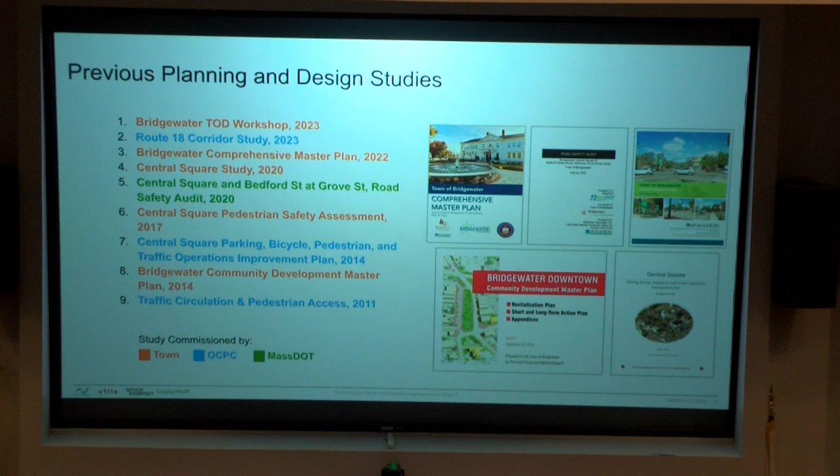Thank you all for coming out this evening. As Pete mentioned, Jeff Van Lee, Senior Project Manager with Mitch Engineering. As Bob mentioned, there's been a host of studies, documentation, planning exercises that have studied and looked at Central Square over the years, many times. I was involved with putting together the documentation for at least a few of these when I was with the previous firm, so I bring experience designing, studying, and looking at design options for Central Square.

This just gives you a host of what's been done previously, not to suggest that anything here has been incorrect or wrong, this is just the next step towards providing a positive outcome for Central Square. The latest study is coming in 2023 with the Bridgewater TOD workshop, Route 18 corridor study that was put together by the Old Colony Planning Council, the Bridgewater Comprehensive Master Plan, and the road safety audit and pedestrian safety assessment that was involved.

Bob mentioned a lot of this. Why are we here? Again, this is just taking the next step towards transforming downtown Bridgewater and Central Square back into a vibrant, community-focused, walkable center.

Again, I mentioned building this exercise based on the fundamentals of what has been presented previously. One of the fundamental reasons we are here is to take the information we've seen previously, gather your feedback, and produce construction-ready design documents so that we are ready to proceed with an actual design. I mentioned the latest traffic study was conducted in 2019 that I helped facilitate.

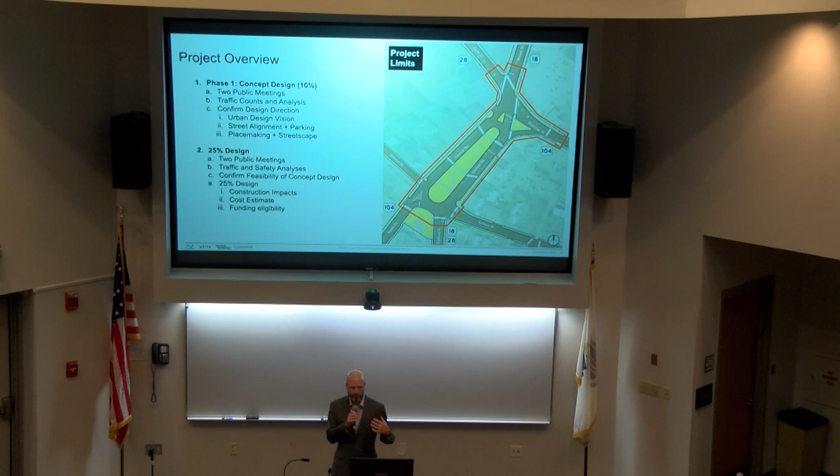We have two public meetings scheduled. This is the first of those two. I mentioned the traffic counts. The traffic analysis will follow, where we determine the appropriate vehicle turning movements and lane appropriation, so that we might establish what is useful in terms of design.

Once we're able to confirm a design direction based on the feedback, we will understand the street alignment, parking, and how that fits into the needs from a traffic perspective. What does it mean from a placemaking and streetscape standpoint? How does that fit in with designing places that people want to be and want to visit? And how do we get that to look the way we want it to?

From there, we take that to 25% design. We'll have construction documents, and we'll understand impacts a little more firmly in terms of cost perspective and how implementable it is. We'll provide a cost estimate, and then determine eligibility for funding as it relates.

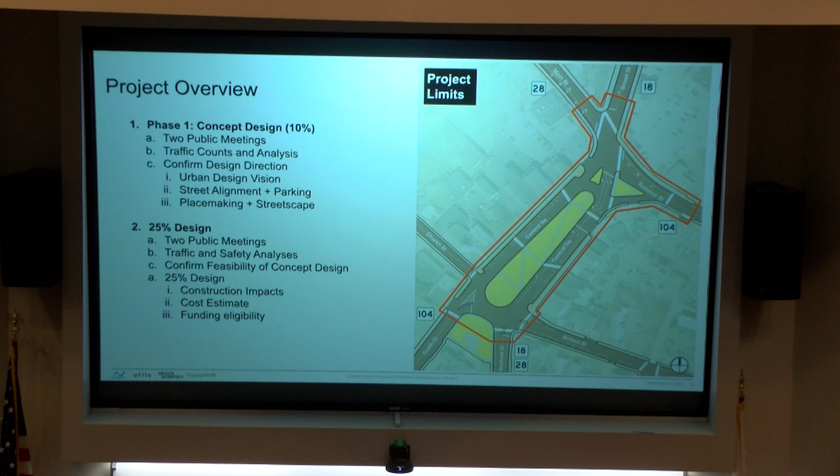So this is really just a roadmap of the previous slides — we're here now during that concept one initial phase. The second public meeting will be in December. By then we'll have a little more information from the traffic data collection and our preliminary analysis.

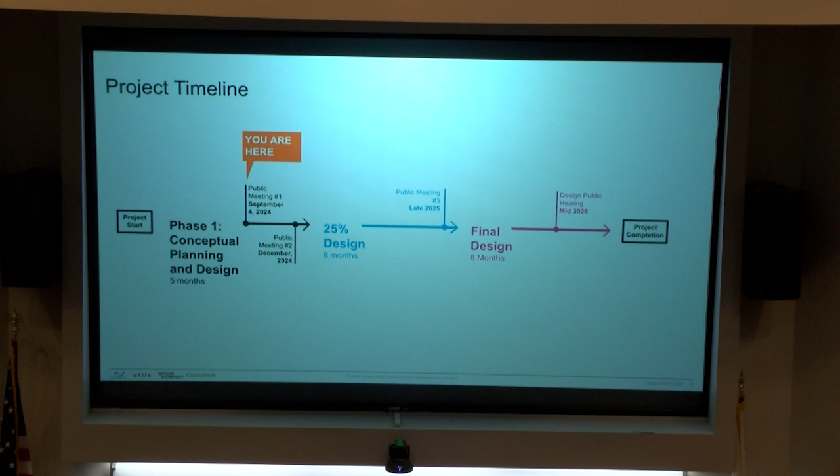Then over the next eight months, we'll take it to 25% design. We'll have another public meeting, and from there we'll take it to the final design. We'll do a design public hearing, and then we'll be on to full implementation and construction.

I know many of you are familiar with Central Square, but some of you are not. Some of the ideas we've shared over previous studies reflect what the project team understands the project goals to be. That's part of the reason we're here today — to confirm some of those project goals we're coming up with as a project team, but also to hear your feedback.

Part of the ideas we've come up with is to upgrade and rethink the need for the existing traffic signals, improve the signage and striping throughout Central Square, and improve the traffic management.

So what does that mean? Potential for widened sidewalks, shortened crossings to enhance visibility — we saw that a little bit in the video — providing bicycle facilities, and enhancing the streetscape furnishings.

The third piece speaks a little to the economics, which I haven't mentioned much, but I think it's very important — what does it mean for the viability of businesses within Central Square and in the town of Bridgewater? So how do we tie together a pedestrian-friendly environment with enhancing the availability of public space and placemaking?

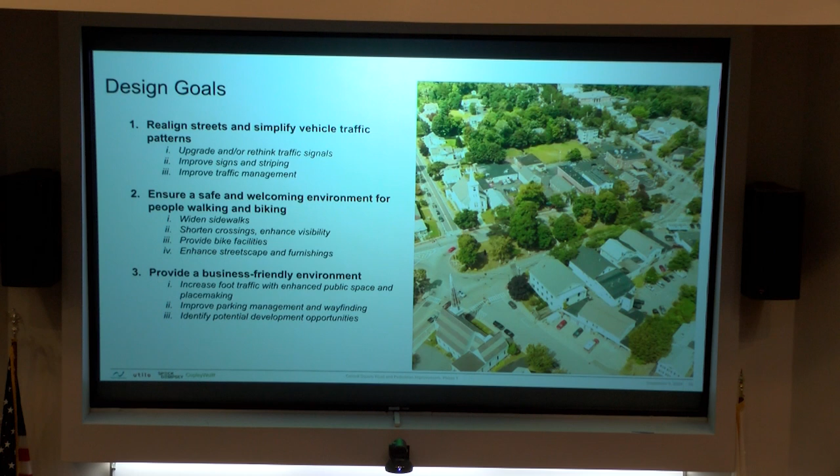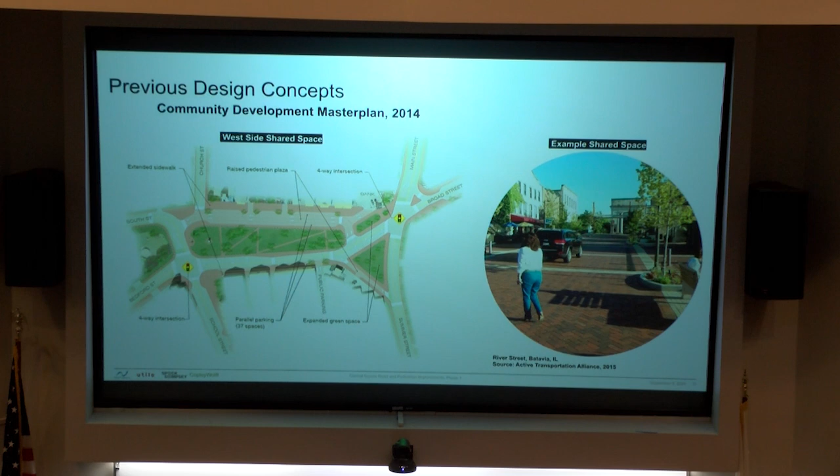So this is just a snapshot of some of the previous design concepts that have been shared previously. This first design concept was outlined back in 2014. Just for orientation purposes, north is to the right here, which is the only plan we're going to show that shows north to the right. Everything else will show north straight up into the page.

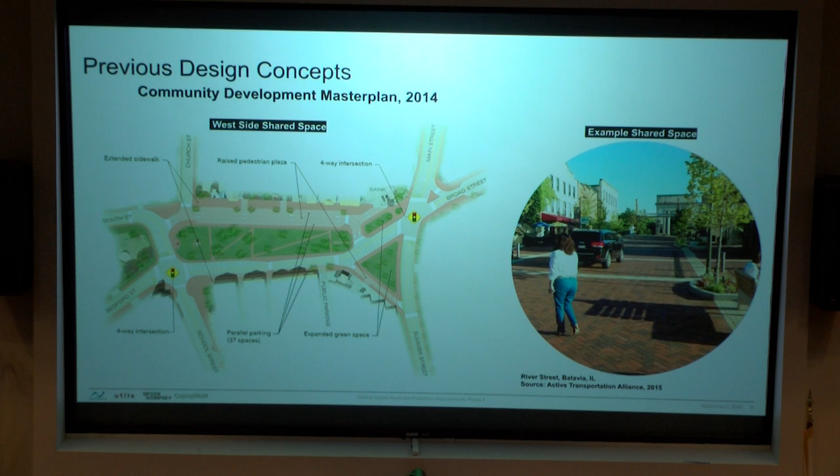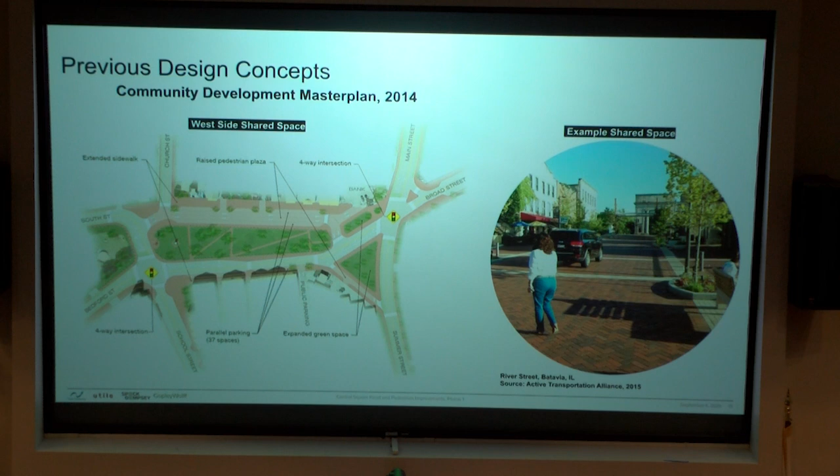This concept looked at a shared space concept, shown on the right here, providing a bit more multimodal viability, having pedestrians, bicycles, and vehicles coexist in a singular environment. One idea floated back in 2014 was to convert the west side of Central Square to that shared space, converting all vehicle travel to the east side. A lot of this comes with enhancements, because as much as we want to get people out biking and walking, we realize there's significant vehicle traffic through Central Square, so we want to be conscious of how our design fits into that element.

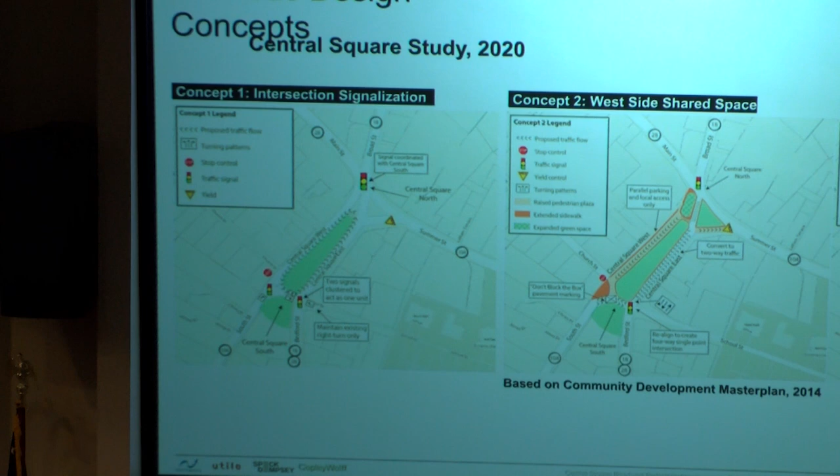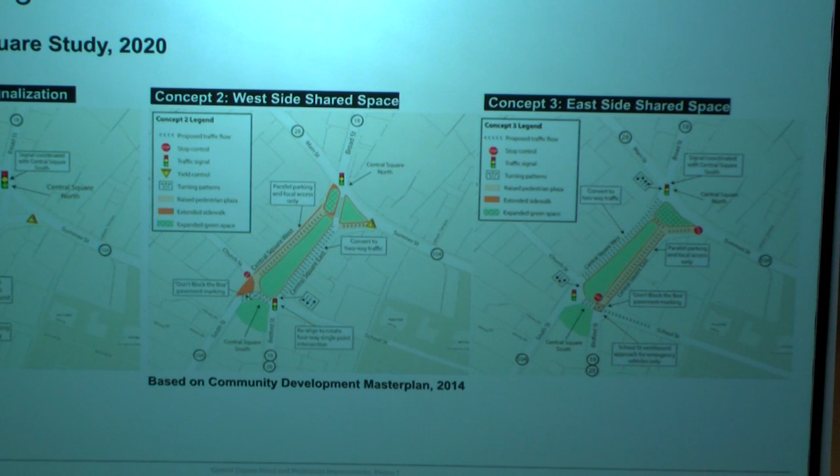Here is a snapshot of some of the other design concepts I worked with when I was with the previous firm. The concept I just showed is the same concept shown in the center here. When I was developing that study back in 2020, we implemented that concept as concept 2, providing further enhancement by talking about lane configuration and signal timing and how that fits in. We were able to use that as a jumping off point into other concepts we could potentially look into.

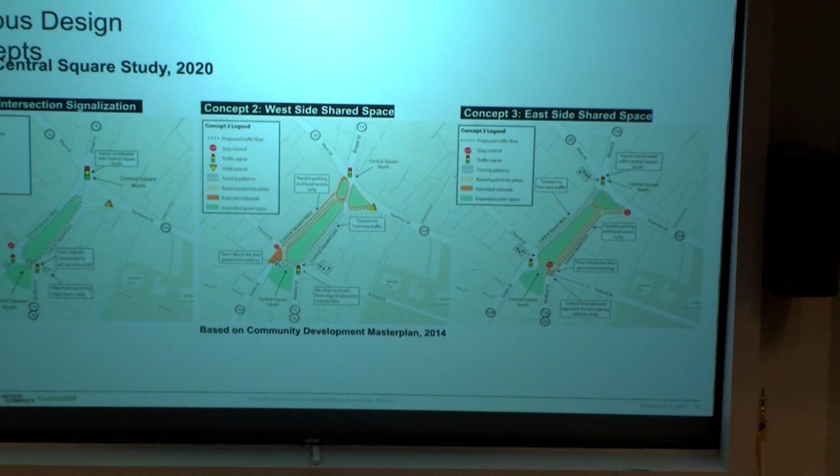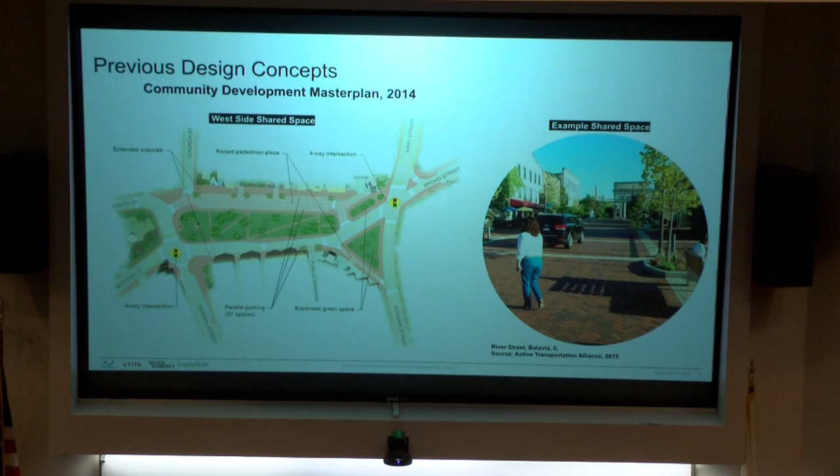The first one we looked into, I'll mention because it's sort of a mirror image of concept 2 shown here, is the desire for a potential east side shared space. It's essentially the same concept, only this would be implemented on the east side, and all vehicular traffic would be moved to the west side.

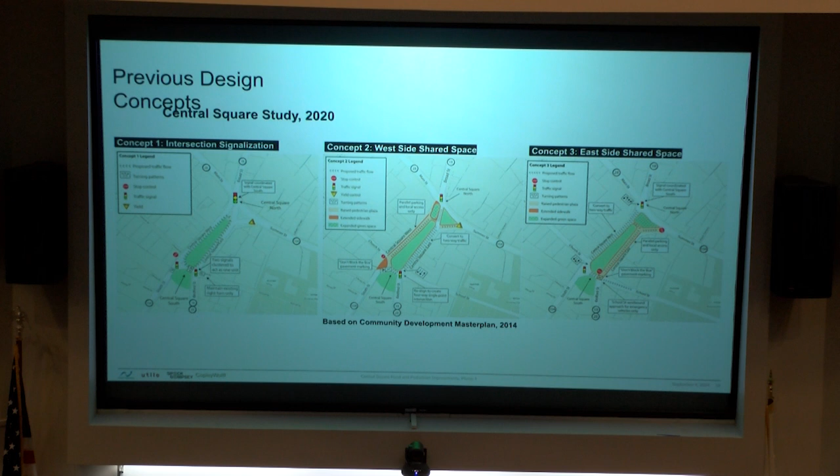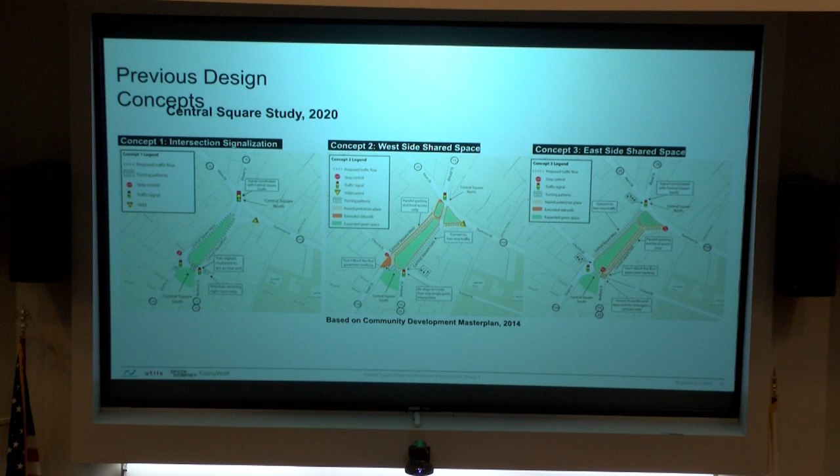The first concept shown to the left is just a cleaned up version of the existing conditions today, with the implementation of a full traffic signal at both intersections on the south side of Central Square. Obviously the traffic signal timing would have to be adjusted to provide the ability for traffic to move efficiently through Central Square. So these are the 3 concepts we came up with back in 2020.

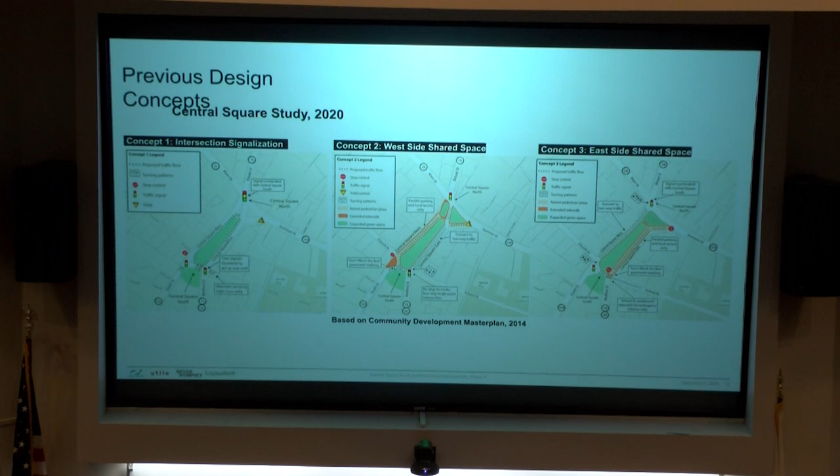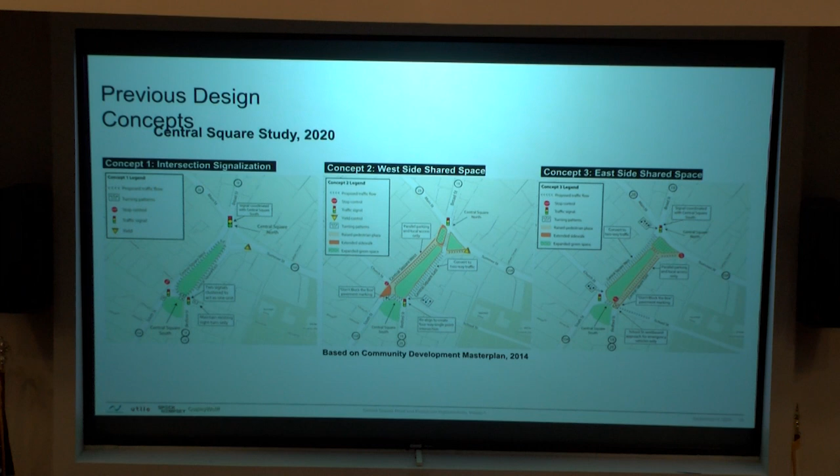Does that take away from the green space of the common itself? That's a fantastic question. This would not. This would be used only within the curb-to-curb width that exists today. There would potentially be some geometric modifications along the edges to facilitate heavy vehicle turning movements, but the majority of Central Square would remain unchanged from the curb-to-curb width.

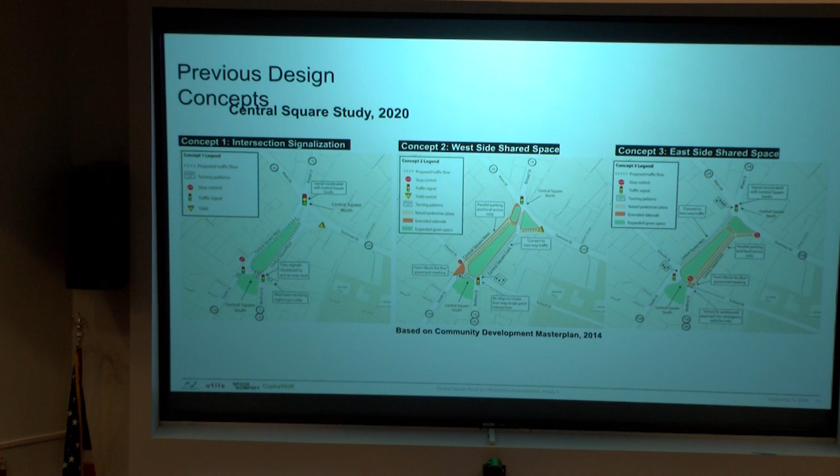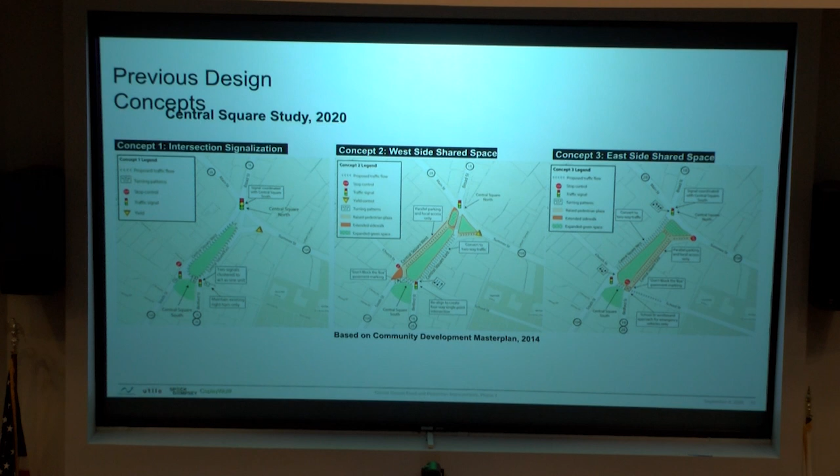When you say the majority, how much percentage-wise? It's difficult to say because we need to make sure that vehicles traveling through here have the ability to geometrically execute the maneuvers. From looking at these, those modifications would be fairly... Why don't people just use their blinkers? I like that.

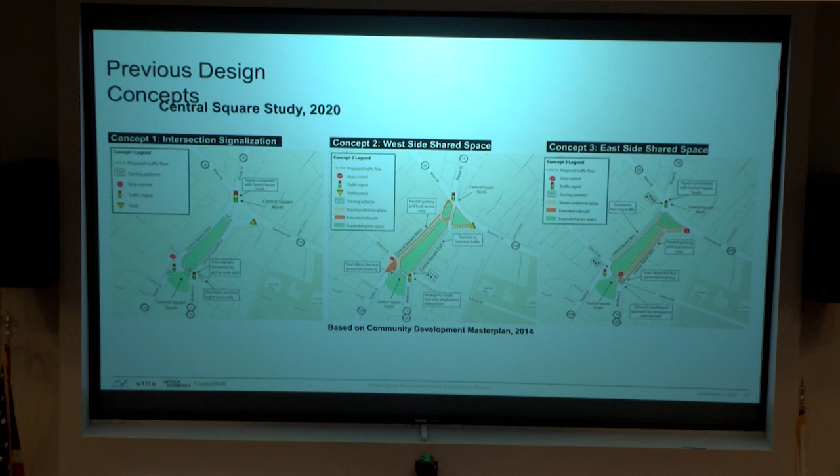And that's part of what we're looking at. We're welcoming feedback this evening because a lot of it is just making sure that it's signed and striped correctly, that the vehicles are where they should be in terms of navigating through Central Square.

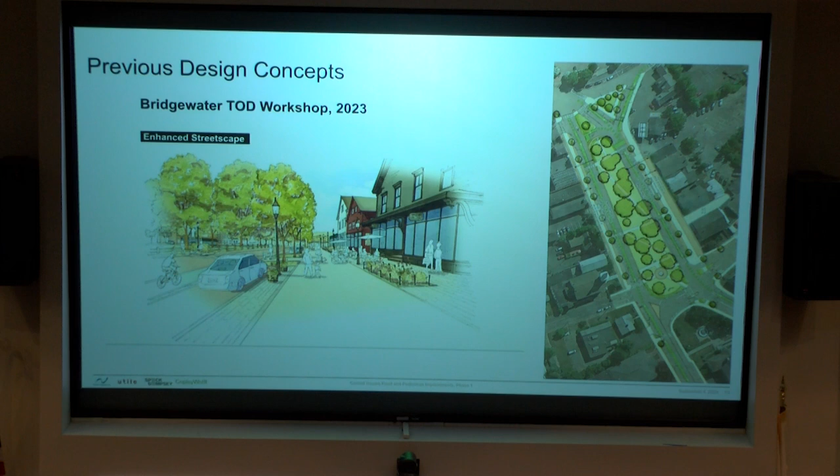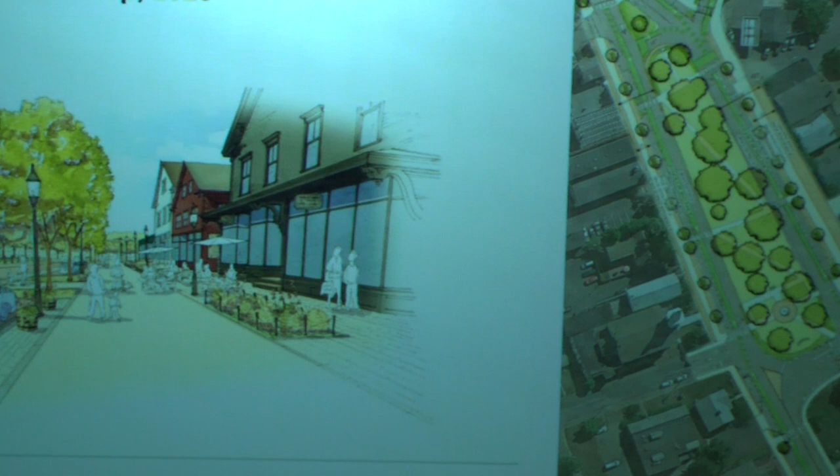So this is one of the other designs that was floated fairly recently. This is a bit more of an enhanced streetscape. This doesn't fundamentally change the traffic flow in Central Square. What this does is just provide additional width for sidewalks and implementable bicycle facilities here as well. So this was the most recent concept that was floated.

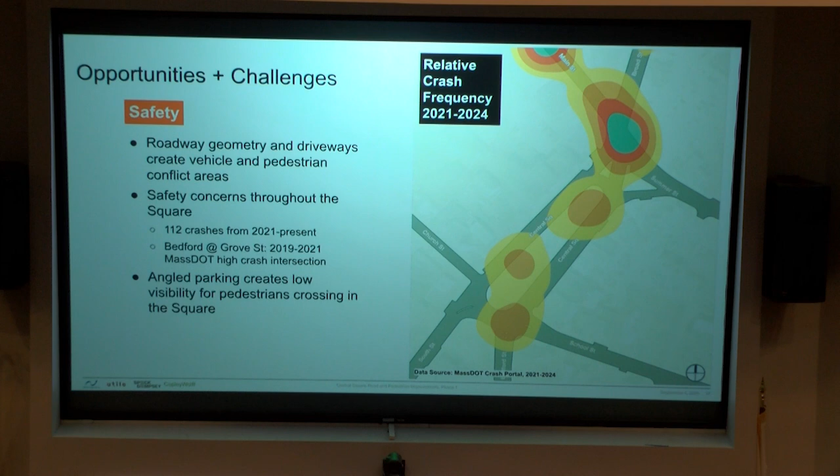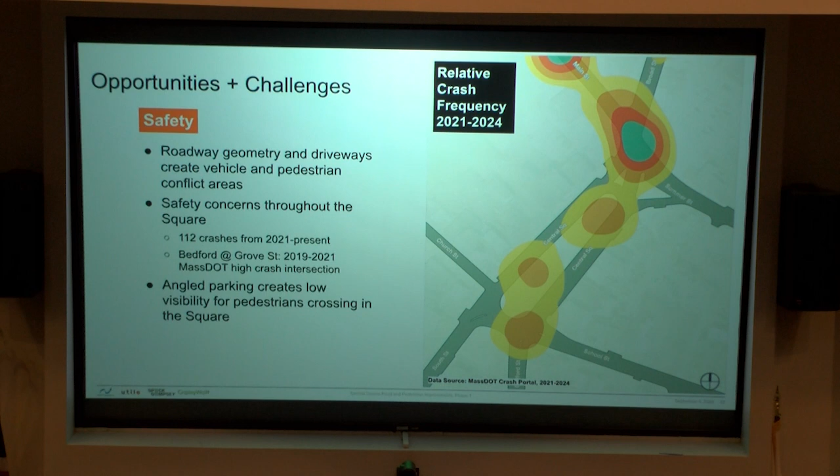Another major issue is safety, for all users of the roadway, whether bicyclists, pedestrians, or drivers. The roadway geometry really tends to contribute to this a lot. This graphic shows the relative crash frequency over the last 3 years, looking at crashes from Mass DOT from 2021 to 2024 - that's 112 crashes. We know there's also a regional crash hotspot on Grove Street and Bedford Street that's been persistent over the last decade or more, and was mentioned in several other studies. There are a number of issues we'll be looking into related to these safety issues.

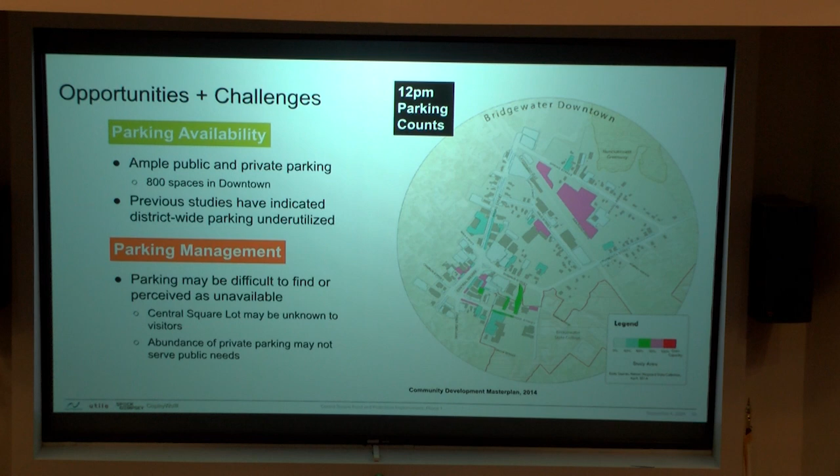Let's talk about parking, everyone's favorite subject. Parking is both an opportunity and a challenge. We've got lots of parking in the district - by some counts up to 800 spaces downtown. But previous studies have indicated that parking around Central Square is underutilized. So the issue may not be parking itself, but management of parking. It may be a perception of difficulty finding parking, because we don't necessarily know where to find it at all times. We could use more wayfinding to get to parking, or it's the fact that you have to pay for it. This is also worth looking into.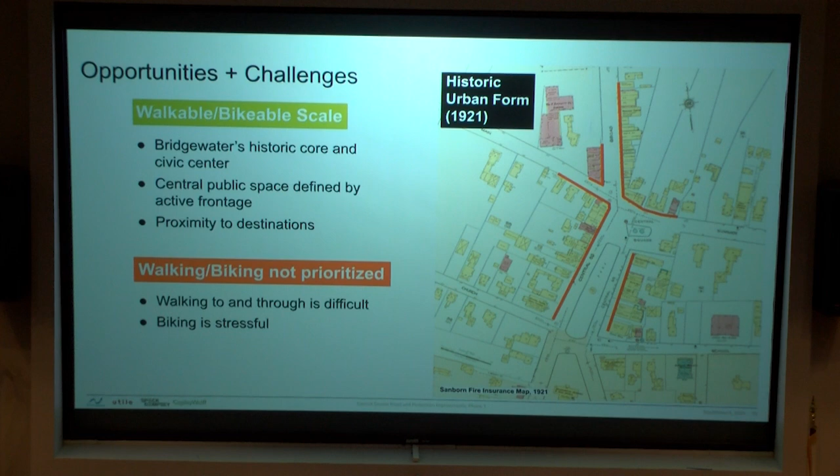The next opportunity I want to talk about is the scale of Central Square. Central Square has great bones - this is your historic town center, the historic core of Bridgewater and the Civic Center, with lots of great institutional uses, campus uses, served by local and national retail.

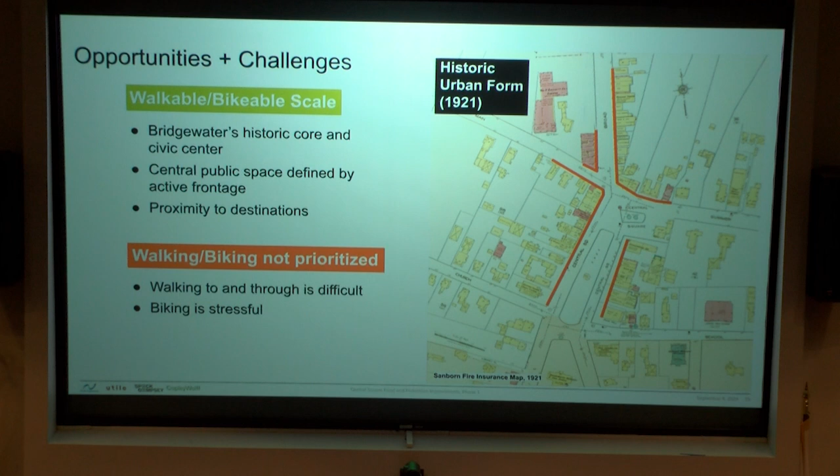The common really helps contribute to this. It's this sort of central green space, a lush place to go and enjoy the shade, nicely lined by active storefronts. So there's lots of opportunity with this physical morphology of the square itself.

But the issue on this front is that we're not today prioritizing biking and walking. Many of you saw in the video that the priority is more on drivers progressing and flowing through the street, as opposed to pedestrians who want to access the common or cross the street.

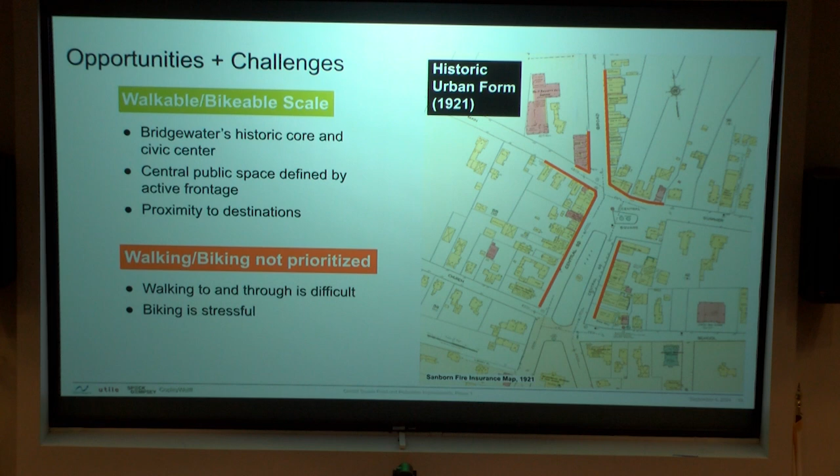For those of you who might be bicyclists, we saw a number of them out there today. Biking is also extremely stressful given the volume of traffic and the speed they're traveling. It's not a well-utilized mode right now.

So one thing I think is really valuable is to look back in history and think about what it means when we talk about a walkable scale, a human scale, and what it means to bring back the vibrant community that Bridgewater had in the Central Square area.

The Common and the Town Hall Green are really historic community assets we need to build on in this process. They're places that are larger in shape, provide space for larger events, provide shade, and a dedicated place for public activities.

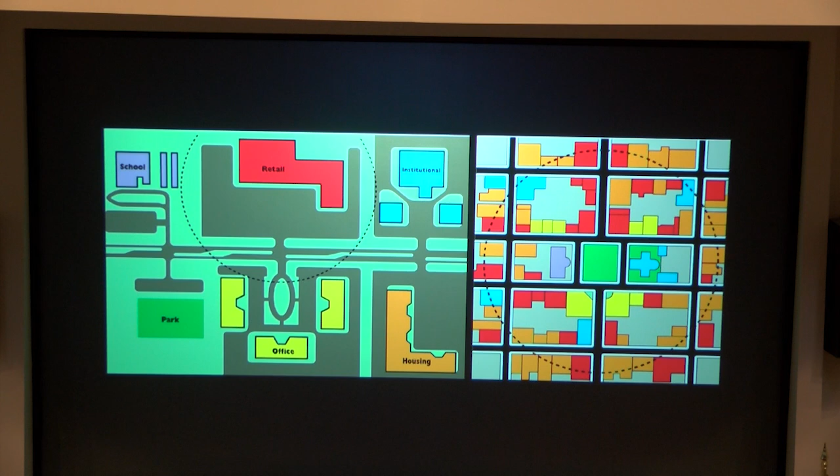Let's move on to existing places, like your Central Square. And here, when we're in this first category of the useful walk, we ask the question: what uses are missing or underrepresented? This is a little less stark in a suburban city like yours. You find it really obvious in the central business districts of our larger cities.

But when you look at these areas and you want them to thrive, you ask what uses are missing and underrepresented. And in most downtowns, there is not adequate housing to support the downtown center. Housing is not properly represented as a use. Jane Jacobs, a famous thinker about planning, commented in 1960 about Wall Street. She said 400,000 people are coming to Wall Street every day to work. Why does Wall Street not have one great restaurant or one great gym?

And the answer was what she called time spread—that a great restaurant and a great gym needs an evening crowd as well as a daytime crowd. So having people working there, sure, but having people living there is the key to having a thriving downtown, and you can't just invite them. You have to put them there, and that means more housing in your downtown core.

So this is a traffic study, effectively, that we're doing in our visit here, but we, as urban thinkers, can't help but consider all the things that would make the heart of your city better, and we do think that it is the right place for a significant amount of additional housing.

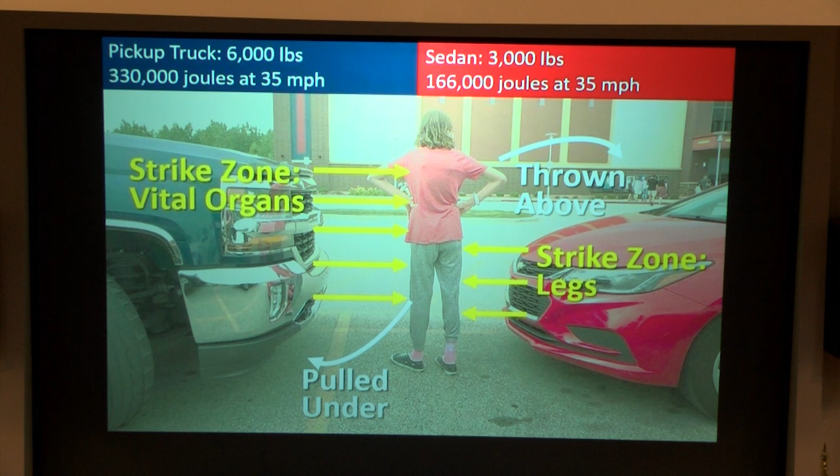There's not much we can do about that in the short term. We can lobby for rules about safer cars and lower hoods, but the way we can do something about it sooner is just to get cars to go the right speed. You're much more likely—more than twice as likely—to be killed being hit by an SUV or small truck than by a sedan.

What we try to do in our work is just get people to drive the speed limit. I can use other terms—slow drivers down, reduce speeding—but basically if you get people to go the speed limit, it would be so much safer, because it's a geometric curve. A little more speed means a lot more injury and death. A car going 35 miles an hour is 7 times as likely to kill you as a car going 25 miles an hour. So getting cars in the lower part of that range is really important.

We have this weird condition in America that doesn't exist in Europe: this concept of Vision Zero, working towards zero traffic deaths in our communities, which we've imported from Europe, and many cities are trying to implement. We have a real crippling factor here—unlike street designers in Europe, we have a different approach to street design in the US, which grew out of highway design.

It's all based on the concept of forgiveness—that we give drivers extra speed, wider lanes, fewer impediments, less imposing traffic, no trees. All the rules many traffic engineers grew up on are about making highways safer, and they do. But they make streets more dangerous because they cause drivers to go faster. This idea of forgiveness, where you design a street for a speed 5 to 10 miles over the posted speed, is why you're speeding through your towns. It's why I speed when I drive. When I get pulled over, I say, this road's engineered for 15 miles over the speed limit—it doesn't really work for me, but that is the case in our country.

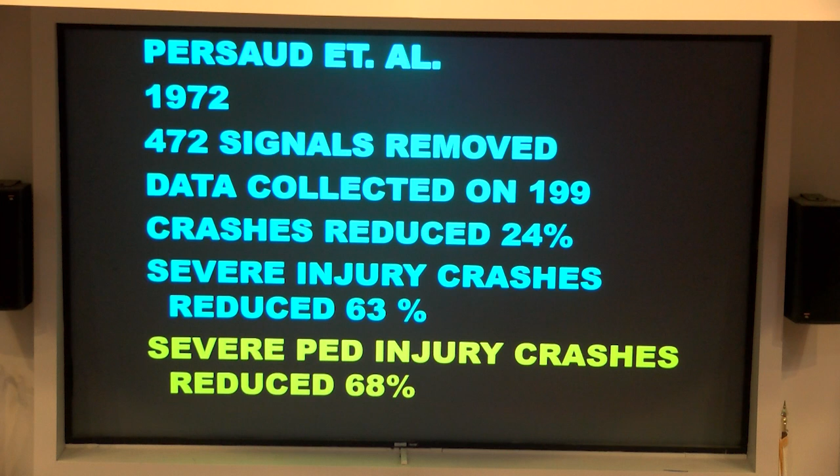This is replacing signals, importantly, with all-way stop signs. So the all-way stop sign, it's what I call the good city. Everyone mixing - the cyclist is going the wrong way, he doesn't care. The person in the wheelchair is very comfortable. Because why? Because only the most blatant criminal is speeding through the intersection.

Do people roll through? Sure. But if people don't want to get hit, let alone hit other people, they go through the intersection with caution. There's a lot of eye contact.

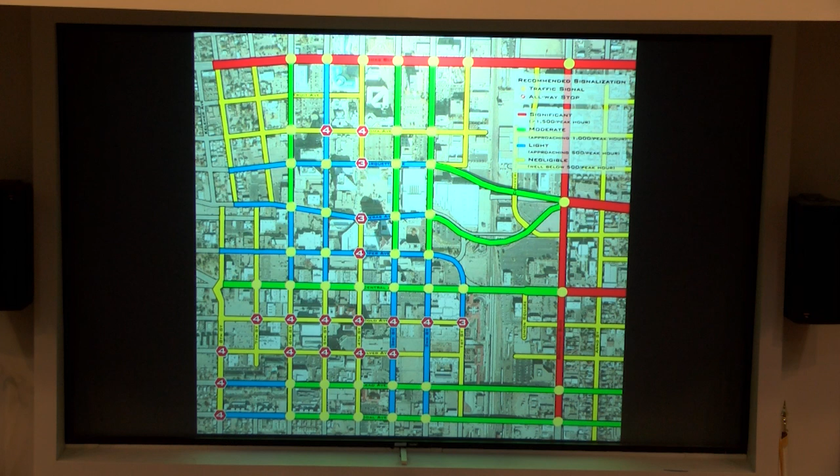People see each other. This is a typical plan that we did for Albuquerque. We recommended that, I think, 11 or 15 signals be replaced by all-way stops. They took us up on, I think, 7 of them. And they bagged the lights and put up all-way stop signs.

And there was a revolt because people don't like change. So then they bagged the stop signs, and there was a bigger revolt. And this is the news article from the TV news where it basically says city reinstalls stop signs to reduce traffic pileup as well as speeding.

Because what people realized is that stopping at every intersection briefly to pause was getting them through the downtown faster than waiting at lights. And that's the big surprise - a downtown with stop signs is actually quicker to get through at lower speed.

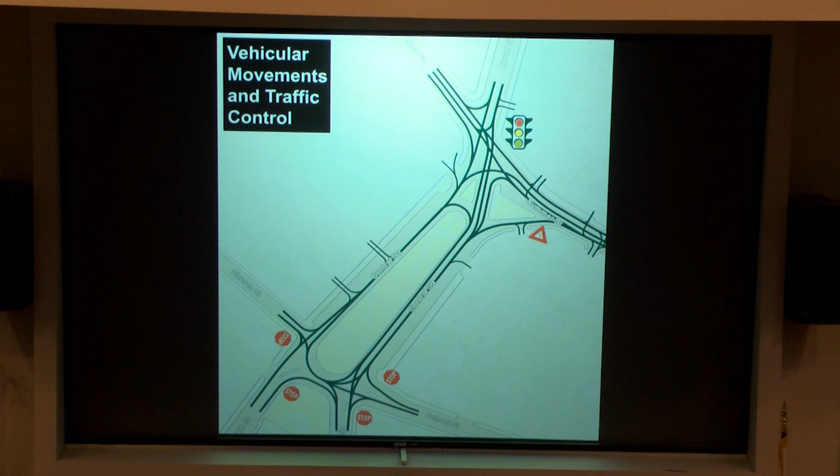Look at the coincidence here between your relative crash frequency and where the signal is, right? You've got stop signs to the south. You have the flashing signal there, but it's just a flasher to the south end, it's not a stop-and-go signal. The north is where the signal is, and the north is where most of your crashes are.

So actually, I didn't see this as a problem. The video called these close calls. Actually, the close calls that it showed is what happens naturally when you have a stop sign - just people looking at each other, people waving. But the data makes very clear all-way stop signs are safer.

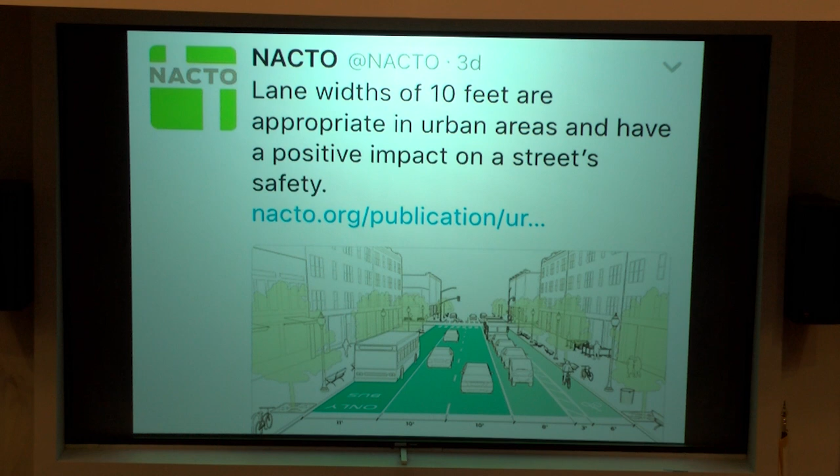And there we have, thank goodness, an organization called NACTO. It used to be everything was ruled by AASHTO, the American Association of State Highway and Transportation Officials—and the H in AASHTO was highway. But now we have NACTO, the National Association of City Transportation Officials, and they say that 10 feet is the right width for an urban lane.

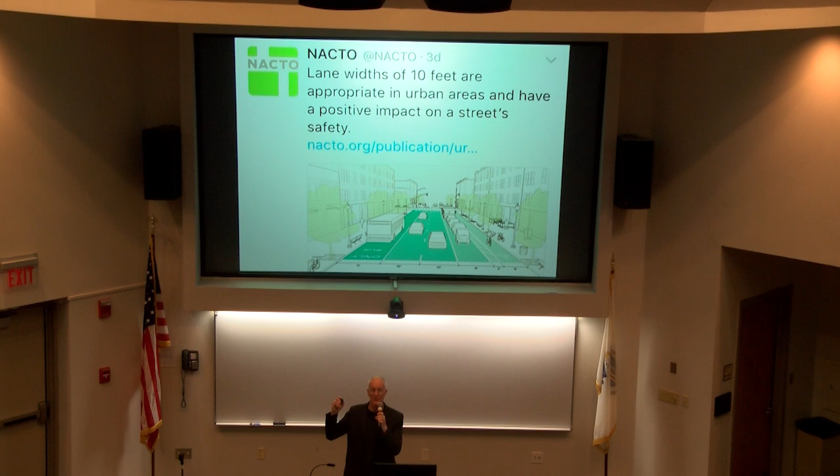What we've seen across the years is 10 feet become 11, become 12, or wider in a lot of our cities, with nary a thought to what that was doing to vehicle speeds. You would think we were being protected from speeding by our engineers, but we were not. And let me interrupt myself to say, everything I'm telling you about engineering, I learned from engineers.

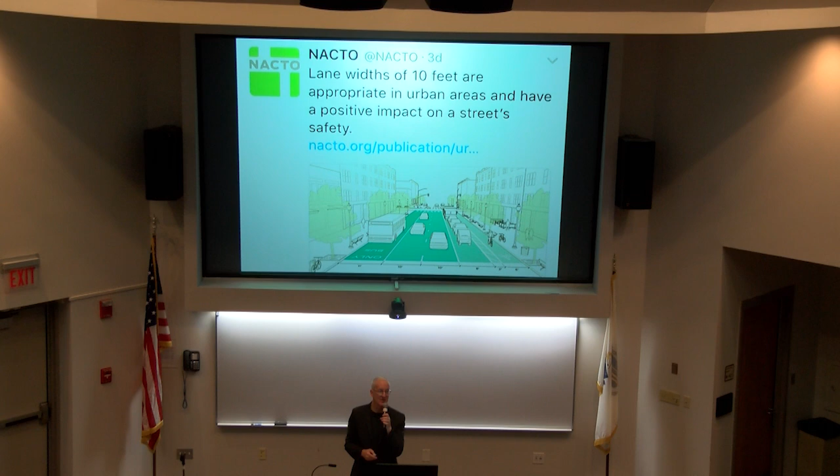So you have all these opportunities to tighten things up. And let me say, if we did nothing more through this exercise—and by we I mean all of us as a community—if we land on a solution, as Tim suggested, where all we're doing is making the lanes the right width, and maybe embracing the parking with some extended sidewalks and doing other things like that, we will make the downtown a lot safer. We don't think that's the optimal solution, but there's a lot of improvement that can be made just by right-sizing the lanes that you have.

Next is parallel parking, or angle parking. But having curb parking, parallel—

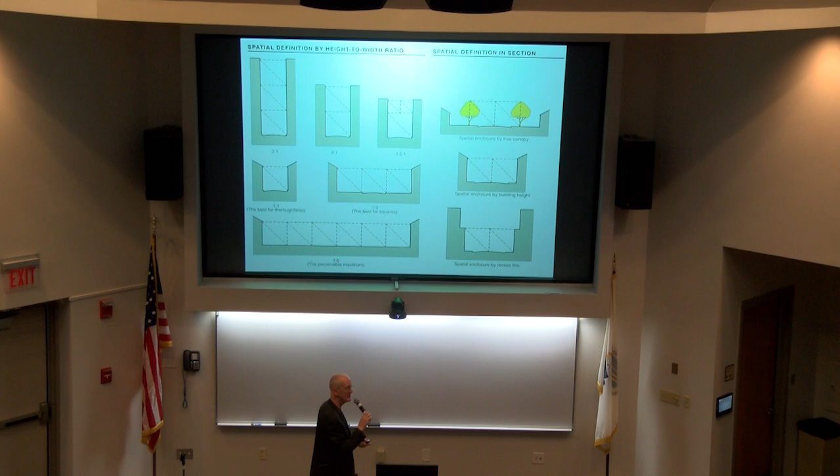And so when you build parking, you need to hide it. We learned from Mayor Riley in Charleston, mayor for 40 years: it only takes about 25 feet of building to hide 200 feet of parking.

I want to quickly turn back to the square and look at the older schemes. You know that this is the condition that we're currently inheriting, and we have these three separate plans that we're starting with. Just to reiterate, one current solution being considered. These aren't the only three solutions we're going to consider, but essentially one approach keeps the traffic flow the way it is now, but right-sizes the streets, does some nipping and tucking so that people are less likely to speed.

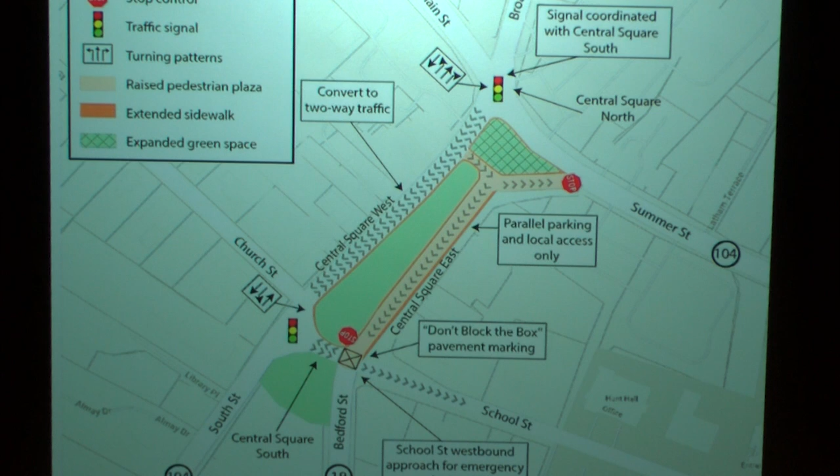Our instinct based on these earlier plans is that we'd likely consolidate the 3 lanes of travel we currently have onto one side, and on the other side have some very slow-moving shared space, a paved area that cars can come through, but everything about the geometry says go slow, with convenience parking and other things. We feel that would attach the green back to the community and would also create a traffic condition where the shops would start to do better.

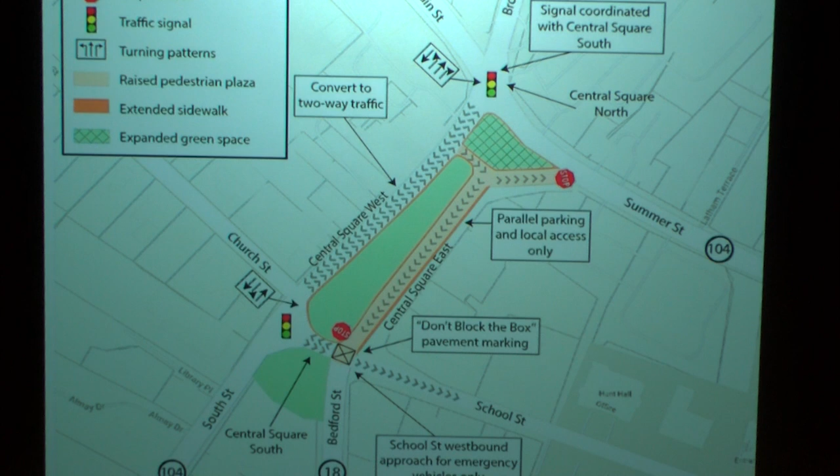So this solution shows the traffic on the west flank and the attached shared street on the east, which we think probably makes more sense because there are more students to the east, more bodies, and more shops directly on that side. But we're also considering this solution, which just flips it and attaches on the other side.

So you've got a great green, you've got great bones, as was earlier mentioned. You have a lot of bad design that is easy to fix, simply in the traffic geometries of your central square. So we have every reason to think, as we've experienced in other places where we've done similar work, that making those changes will dramatically improve both the accommodating nature and the business success of your downtown core.

So I think that's all I have to say. Some resources I like to share with audiences are books. I would direct you first to Walkable City if you're looking to learn more about this. There's also Walkable City Rules, which is more technical if you're a technician or you care about measurements. The TED Talk I mentioned, but there's another TED Talk that is more like this one, called 4 Ways to Make a City More Walkable - it's not why walkability, it's how walkability. Our website is Speck Dempsey, like the boxer Dempsey. You can find all those resources there.